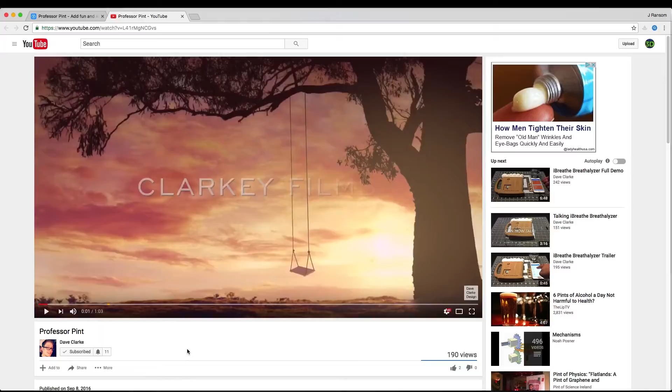But it looks very cool, and I'm really curious to see how these hands print. Along with this mustache area here, I think we're going to have to add quite a lot of support in Simplify 3D. So let's go ahead and download this thing and head over to Simplify 3D and get it ready for printing on the gMax1.5XT Plus.

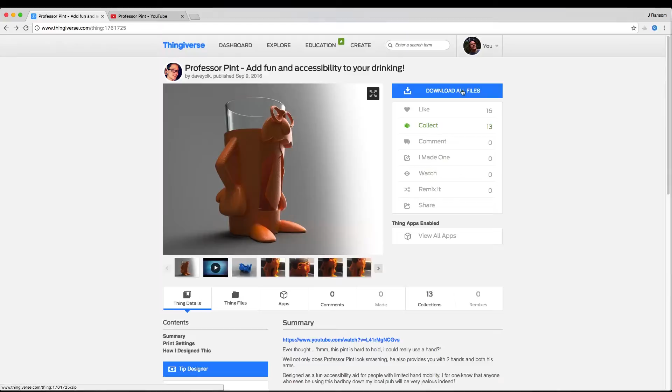Alright, so here we are in Simplify 3D, and I went ahead and put in a whole lot of support, and I'll show you why. Now I've saved this as a factory file so I can reopen this anytime I need to. So let's go ahead and close out of this. Let's open up a new file. And let's drag over the Professor Pint STL file.

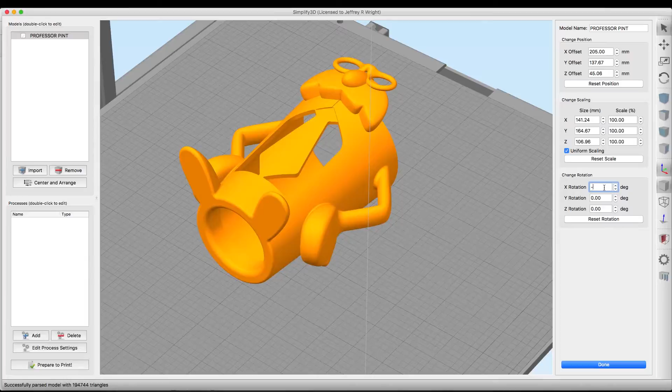So it looks like we're going to have to turn him. So let's do minus 90 degrees here in the X, and then we'll do center and arrange. Let's take a look at him here real quick. Let's go ahead and add a process setting, and let's turn off the support material just to see what it looks like without having support generated. And let's hit prepare to print.

Now from what I can see, these hands and that mustache and probably these glasses and nose are going to need some support material because they probably print in the air, just like I said earlier. So let's take a look.

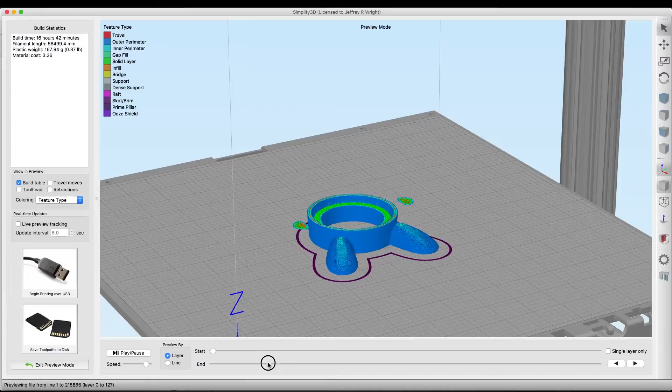And let's burrow down here. Yep, support is going to be needed for sure on this one. And then the mustache itself, it starts in the air a little bit there. It's a little bit connected, but there's a few spots there. And of course, those glasses are going to need a little help too.

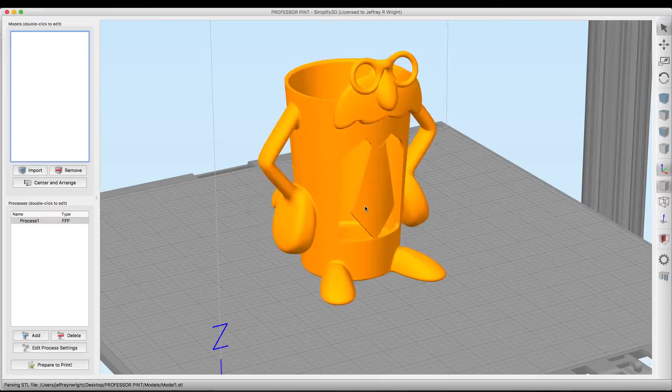So let's go ahead and close out of this. We'll exit the preview mode. And let's open up my factory file again, which has all my settings saved. And we don't want to save this, we'll hit no. This has all the support using a generate automatic support command.

And then I went in and added individual support using the add new support. So let's hit done here. And if we swing around to the bottom, you can see what I did. I just stacked up support underneath each of these pieces because I wanted these to turn out as best as possible. And I made sure there was enough support here in the glasses. So I think this looks pretty good.

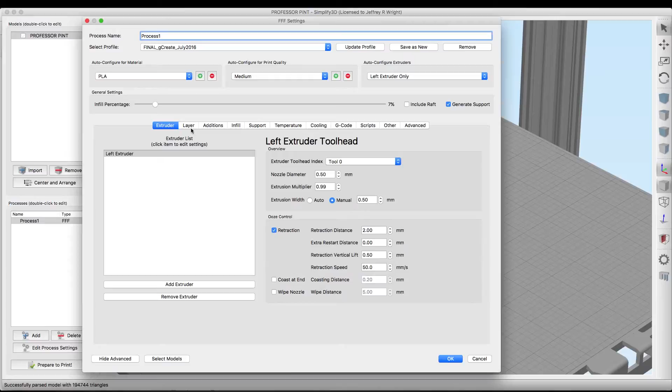So let's go ahead and edit our process settings and take a look what I have set up here. Under layer height, we're going to do a 0.2 millimeter layer height with 4 top layers and 3 bottom layers and 3 perimeters. I'm going to run my skirt at 10 millimeters from the object, 4 outlines with just 1 layer.

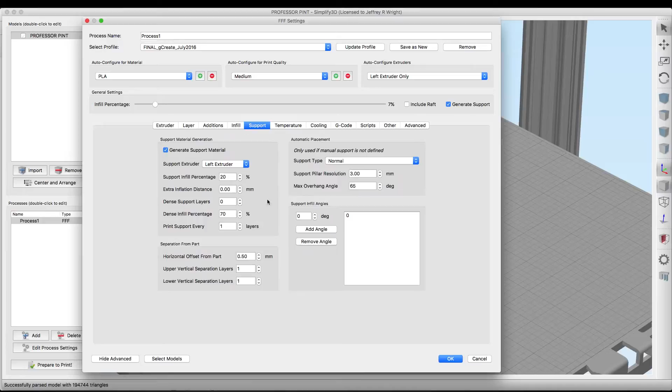With infill, we're only going to use 7% on this guy because he doesn't really need that much. I think his base is strong enough that we'll be okay. Obviously, we're running support material, and we have it set here.

Under temperature, I have 2 different settings here. I want it to really stick, so 206 for that first layer, and then on the third layer we'll drop down to 204. It's only a few degrees difference, but with the cooling as it is, which I'll show you here, under cooling, I've got a 3-stage cooling going on.

For the first layer, we're going to go 0. On the third, we're going to kick it up to 60. And on the fourth, we're going to go to 80. The reason why I'm doing this is I noticed that when you kick the fan on pretty high, it cools off the hot end very fast, and that could cause some backflow issues.

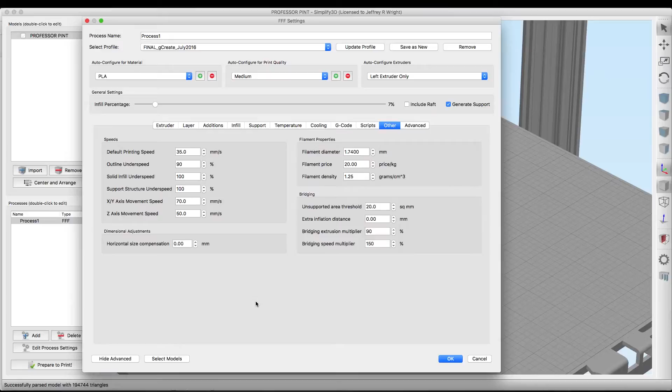Under speed, we're going to run this at 35 millimeters per second. I've been running a lot of my prints at this speed, and they actually turn out much better. So let's go ahead and hit OK. We've got our support built in. Let's hit prepare to print.

This shouldn't take too long. There is a lot of support material being generated, and it is doing an auto support, which it does on the fly.

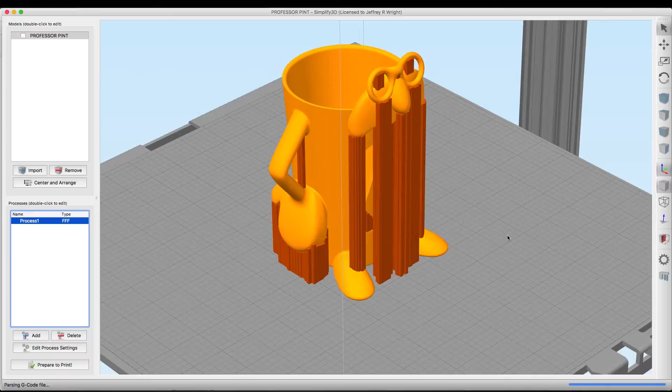And it should be ready to go here. It's parsing the last of the code, and there's our preview file. It says it's going to take about 13 hours and 57 minutes, so 14 hours, and 0.43 pounds of filament, or 193 grams. Material cost is only $3.86, so that's pretty nominal.

So let's go ahead and hit the play button and see how this prints.

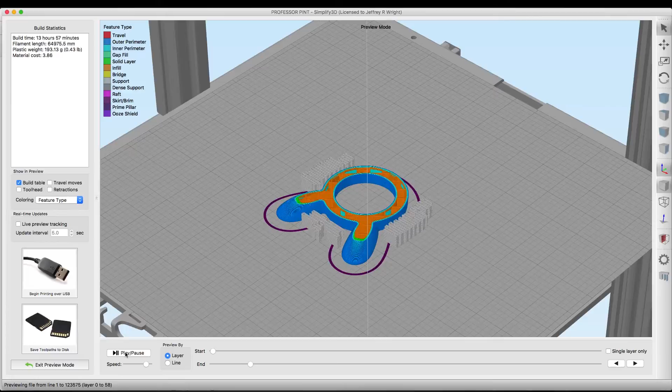And as soon as we get up to the hands, there it is. You can see that support material is super important, and I don't think this is even printable without it.

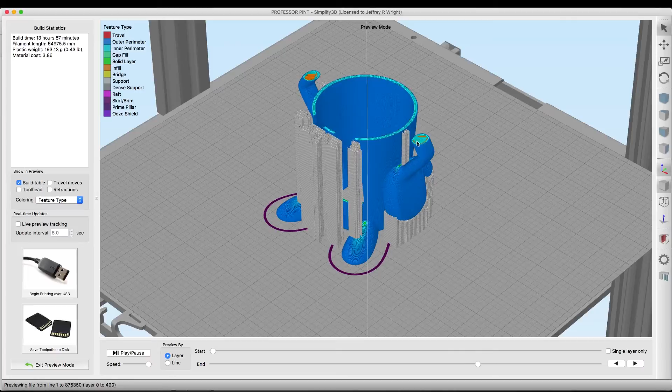So we'll speed this up a little bit. And it looks like adding the support between those arms is a good idea, because once we come around the top here, as you can see, we're going to be joining these up on a pretty extreme angle, and I just want to make sure there's something there for them.

And as we get up here to the mustache and the glasses, as you can see right away, that support material is very important.

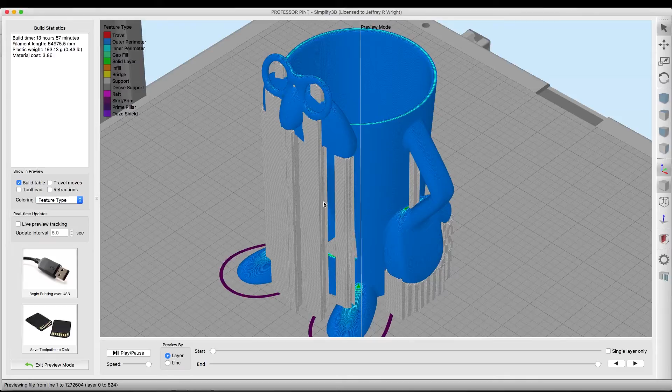So it's finishing up, and it's starting to do the glasses and finish up on the top of the head here. Adding that little bit of extra support there, only because it's very thin and it's going to be running pretty quick at 35 millimeters per second. But this should be good.

Let's save this off to the disk and head over to the gMax 1.5XT Plus, load up some of that MatterHackers PRO PLA and get this printing.

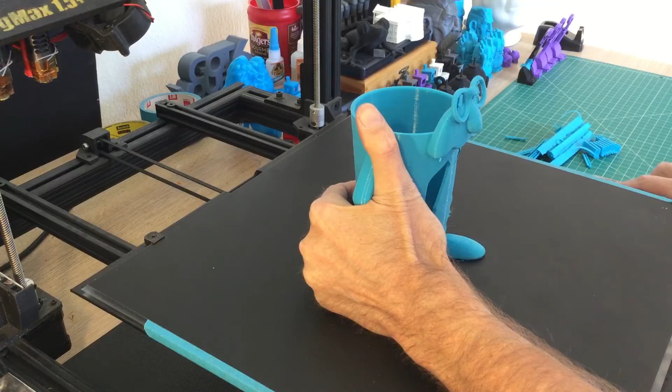Okay, so after 15 hours of printing and freeing it from its support material, we have a good print. This turned out pretty awesome. I'm really happy with this.

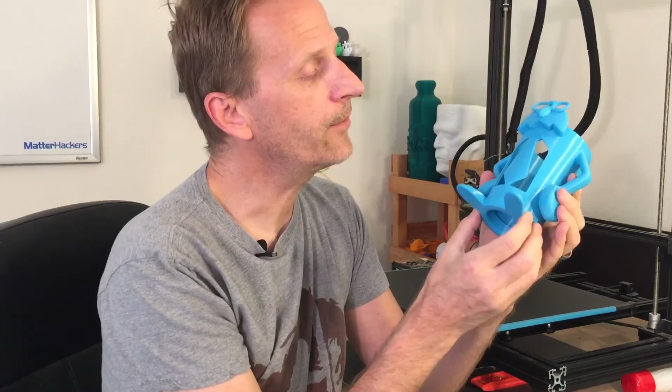There's a lot of real detail here on his tie. His glasses turned out pretty great. We did use a lot of support material, so these areas could print around the bottom of his hands and his mustache, and they're a little rough, but a little bit of sanding and Bondo will fix that. But all in all, I think this turned out pretty great.

I just need to slide a pint glass in here and fill it up with a tasty beverage.